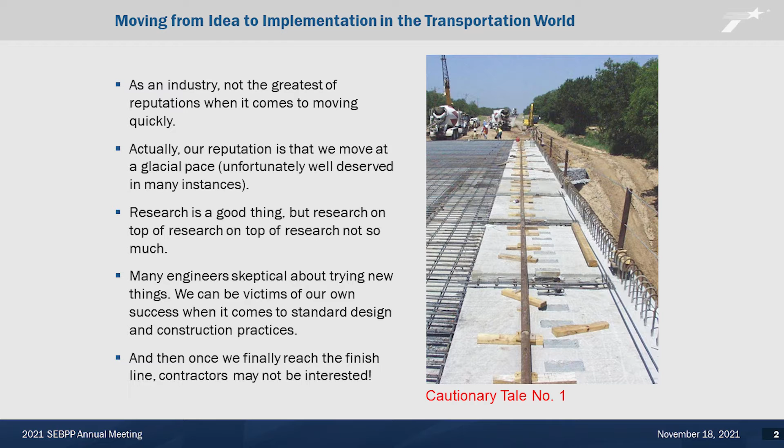So the photo I show there is cautionary tale number one. I've got a few cautionary tales in this presentation. Those are the overhang panels that we spent about 6 years developing in Texas. Anybody want to guess how many times they have been used since we got them in the standards? It's zero. So something to keep in mind as we are looking at new technology and developing new things: make sure everybody's on board. Don't do it in a vacuum. Point is, as an industry, we don't move real quick.

But I think this doesn't really apply to us in this partnership. We've managed to really come together in a way that allows for pretty rapid deployment of new technology and new ideas. And I think that's something that really sets us apart from a lot of the other groups. So a lot of what I focus on in this presentation is how we've done that, and specifically how we've made that work in Texas.

So the National Bridge Preservation Partnership is really finding a way to foster communication, and that's what we're doing here. There's lots of us here: lots of DOTs, owners, consultants, suppliers, manufacturers, FHWA, lots of different folks. We really rely heavily in these meetings on technical content. There's not a whole lot of fluff, and I think that pays off. We're really getting into some nitty-gritty details on the technical side of things. That bullet: it's not just the DOTs talking to each other.

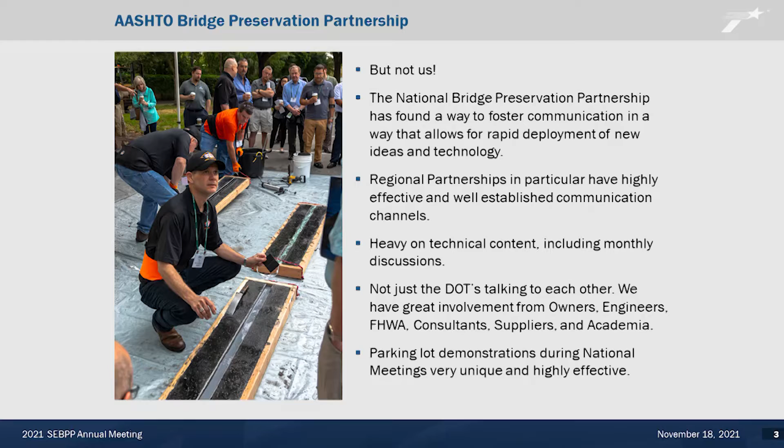It's so important that we all come together and have these conversations. And something that I show there in that photo, those of you that have been to the national meeting. So we have these regional meetings every year, and then the national meeting every 4 years. These parking lot demonstrations are really just out of this world. Just a phenomenal opportunity to learn about new things. So you can see one there in that photo.

Here's another one. People are really, really engaged in these, and I know a number of you have been to them. If you haven't been to one of these, I urge you to try to make your way to a national meeting, and I'm hopeful we'll be able to do these parking lot demonstrations again, because it's just super, super cool to see this stuff, not just talked about, but you're seeing the stuff get mixed and placed, and in a lot of places you're able to get your hands dirty a little bit. Really, really cool stuff going on there.

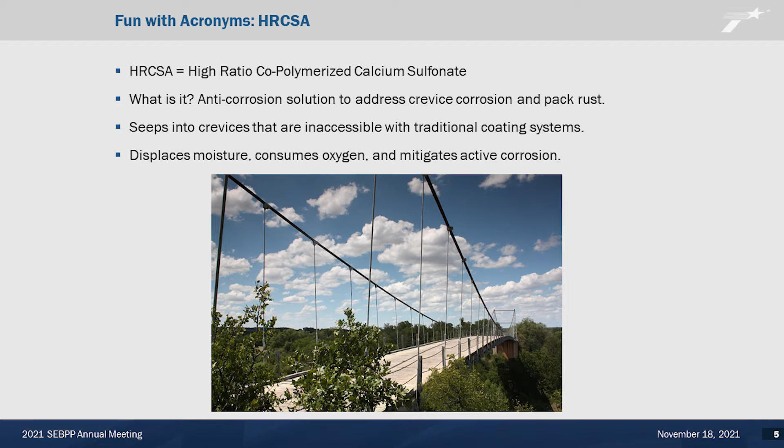So just want to give one example. Here's a fun acronym, HRCSA. What is that? The high ratio co-polymerized calcium sulfonate. What it really is, it's an anti-corrosion solution that will get sucked into those hard to reach steel places that you can't get to with the traditional coating systems. So this is something that I saw in a parking lot demonstration in Orlando.

We have this suspension bridge in Texas and some really, really hard to reach areas in this thing. So we learned about this product. It gets into those hard to reach places, displaces the moisture, consumes the oxygen, mitigates the corrosion. And what we were able to do in this case was use a kind of a mixture of the Thermarust and the coating system, and ended up with a good final product. And I don't think I would have ever known about this had it not been for the time we spent in that parking lot. So it paid off immediately for us.

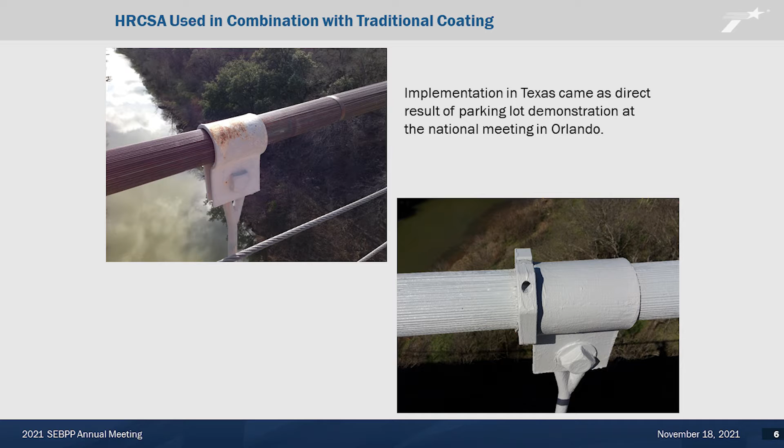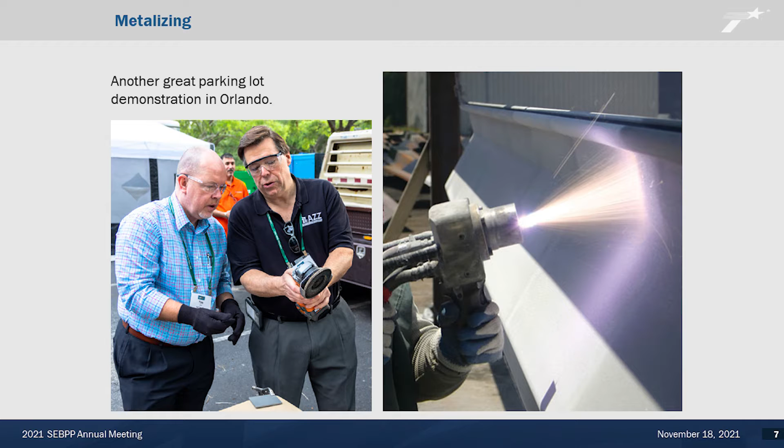Here's another cool one. Hopefully our good friend Kevin Western is in the audience somewhere. He's a regular at these conferences. I think many of you probably know him. He talks about a number of things, but in particular, he has talked about metallizing. This was another great parking lot demonstration in Orlando. So we looked for opportunities to take this back into Texas and implement. And it's really effective. It's a great tool to use, but you've got to do it smartly. You've got to do the right thing.

So here we are at cautionary tale number 2. Metallizing. It's a well-established, highly effective technique. It's been used for years in a lot of places around the country. Illinois in particular, I think, has many, many examples of good metallizing projects. This was something new to us. Took it back to Texas. We learned some hard lessons the first time we did this on an existing bridge. And things that just seem really obvious now, and should have been obvious, caught us off guard on this first one.

So important that I think when we are implementing this new technology that we engage the experts. We talk to other DOTs, we talk to the suppliers, we talk to the consultants, and really get a good set of design plans together, and that we have their involvement during implementation, because I mean, just obvious stuff. The flash rust got us on this project, and the other thing that got us was the torch cut corners, the really sharp corners in these bottom flanges, and metallizing does not play well with sharp edges. And so we ended up with a pretty sizable change order for something that in hindsight we should have anticipated as part of the design. So last bullet there, very important to engage the outside experts to assist in design, plans, implementation, and inspection, especially if you're trying something new.

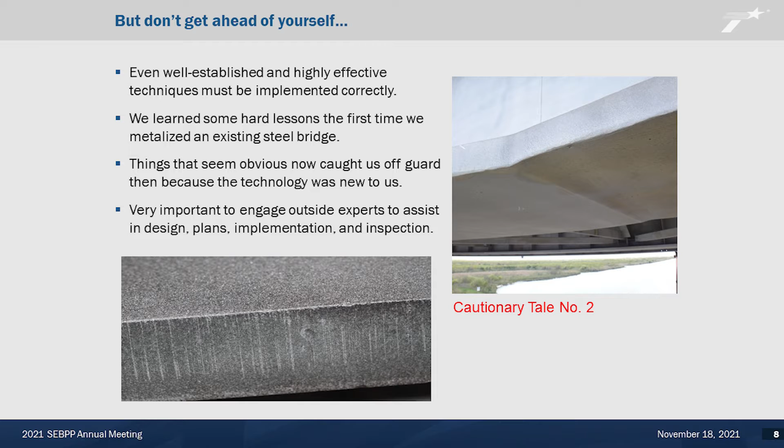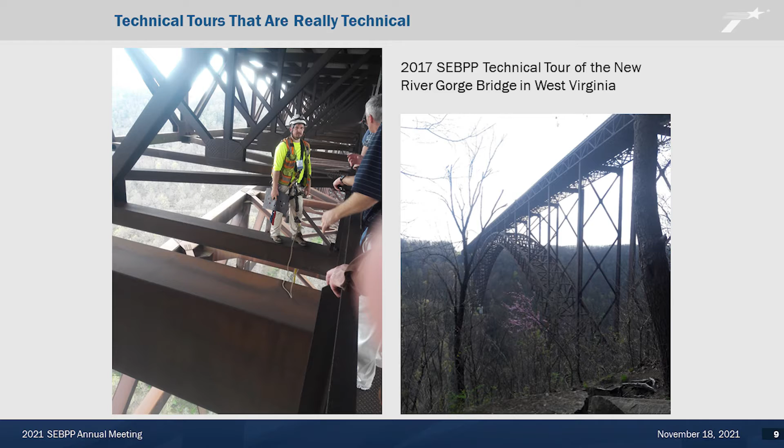Something else that we do as a partnership. We don't always get to do it, but we do get to have some pretty cool technical tours. This was the technical tour of all technical tours. I think it's probably time to start talking to West Virginia again, because we got to go see the New River Gorge Bridge, the catwalk, and this was just tremendous. So we had a consultant that had just done the design on the pretty significant rehab of this bridge, including resetting the bearings. Gave a long presentation. West Virginia DOT gave a long presentation, and then we got to load up on buses and go do the catwalk underneath the bridge.

And it was just phenomenal to have the opportunity to do that and to see what they were able to accomplish. Anyway, 2017, that was 4 years ago. I think hopefully in a few years we can start begging them to go back, because that was really just

an amazing opportunity. And then even 2 years ago, when we were in Baton Rouge, we had a really good presentation that David gave on the Mississippi River Bridge and the recent work they had done on that. And we didn't get to walk the bridge, but we kind of did it in the shadow of the bridge while we were eating crawfish. More things that we do.

So John mentioned the working groups that we have, and there's a number of great opportunities for collaboration, not just within the partnership, but with other groups around the country. So the FHWA's Bridge Preservation Expert Task Group, there's a number of representatives in this room that are on that. The AASHTO T9 Committee on Bridge Preservation, we work very closely together on that one. David and I are both on T9, and we work closely with this group.

And then the AASHTO Committee on Maintenance, the Bridge TWIG, the Bridge Technical Working Group. This is another group that we engage with on a regular basis, and there again, David and I are kind of the liaisons between that group and this one. And then just a ton of regional and national working groups that are meeting regularly, monthly in most cases, and really getting some great work done.

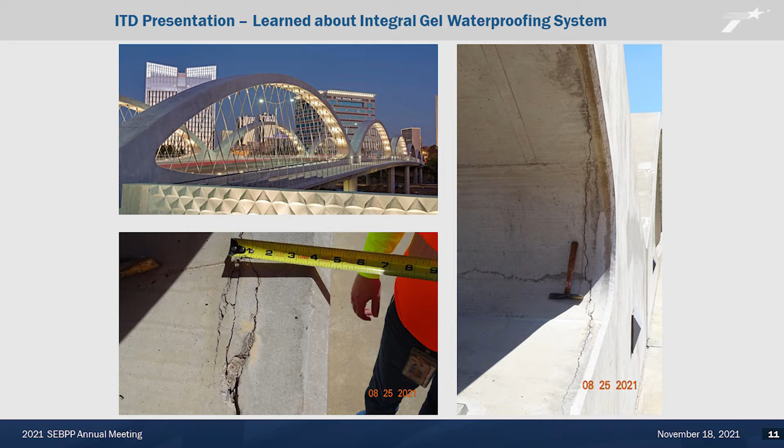So this is the West 7th Street Bridge in Fort Worth. This is one of our signature structures. It's made up of 12 arches. For whatever reason, one of those 12 arches has just been cracking almost from day one, and we've been chasing it and trying to figure out what to do about it. But you can see there, those are some pretty gnarly looking cracks.

And so we're about to do a project with this integral gel waterproofing system, and this is a product that we learned just because we sat in on one of those ITD meetings. So I know a number of you are already on it. If you haven't been on it and would be interested, it's one I would definitely suggest getting in on.

Something else we've talked about at length: hurricanes, floods, emergency response. We have most definitely had more than our share in the southeast of severe weather. Lots of hurricanes, lots of flooding, lots of nasty, nasty stuff going on. And so there have been numerous presentations and discussions on emergency response. And really, it's not just telling the story.

We talk about how case histories really don't offer much value if there's not some takeaways from it. And so what we try to do with these emergency response presentations is really talk about what went well and what didn't go well, and try to talk to each other so there can be some lessons learned along the way. And the contacts made as part of this partnership is really what led to widespread collaboration.

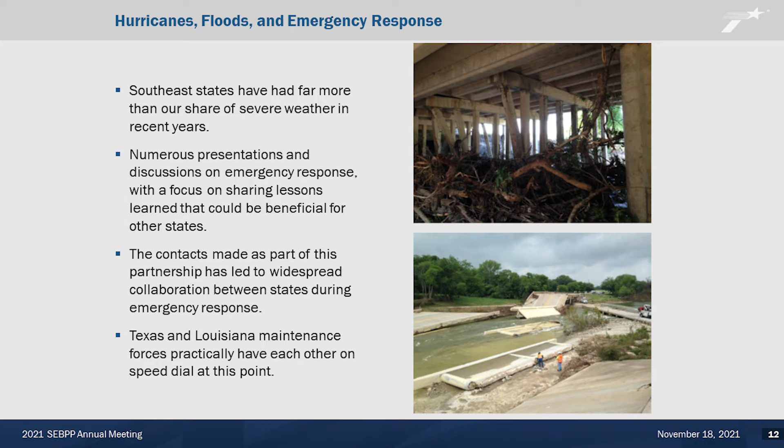And I put there the Texas and Louisiana maintenance forces, I think, pretty much have each other on speed dial at this point, because we had a few years where the hurricanes couldn't miss us, and now Louisiana's had a few years where the hurricanes can't seem to miss them, and Florida, of course, really all the states in the southeast are having this issue. But lots of opportunity for collaboration and lessons learned on that one.

All right, let's get back to some of the technology that we've learned as part of being part of this partnership. And hydrodemolition has been a topic for years and years and years.

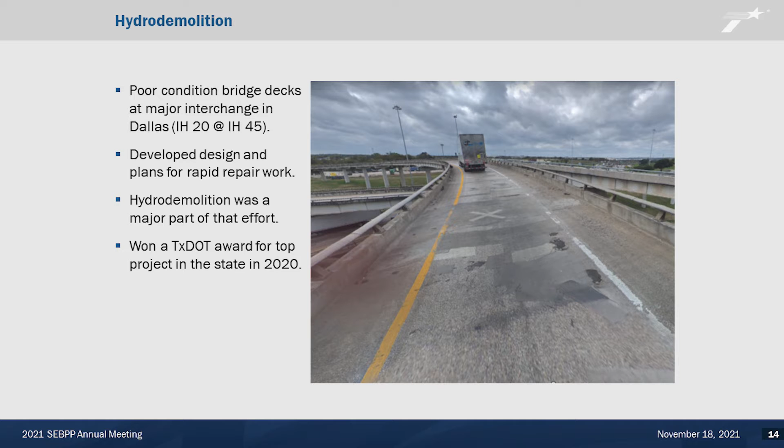There are several champions of hydrodemolition. They are always a sponsor at this, have a lot of involvement. So this is something that we hadn't done much of at all, and increasingly this is becoming a pretty common part of our bridge rehab project.

So the example I gave here, this is a photo straight from one of my presentations that I gave a couple years ago on problematic bridge decks. And this is in Dallas. This is a direct connector connecting two interstates. And this is a pretty sorry condition bridge deck. And it's a big deal when we close the ramp down. So we had to do something quick, so we developed design and plans for rapid repair work, and hydrodemolition was a huge part of that.

So we did have to close the ramp, but using the hydrodemo and a concrete overlay, we were able to do it very, very quickly. And this one ended up winning an award, not just for bridge rehab, but for any TxDOT construction project. There are gold, silver, and bronze awards, and this one actually won the gold medal for top project in Texas last year, and there's a couple of photos of it. So pretty cool stuff.

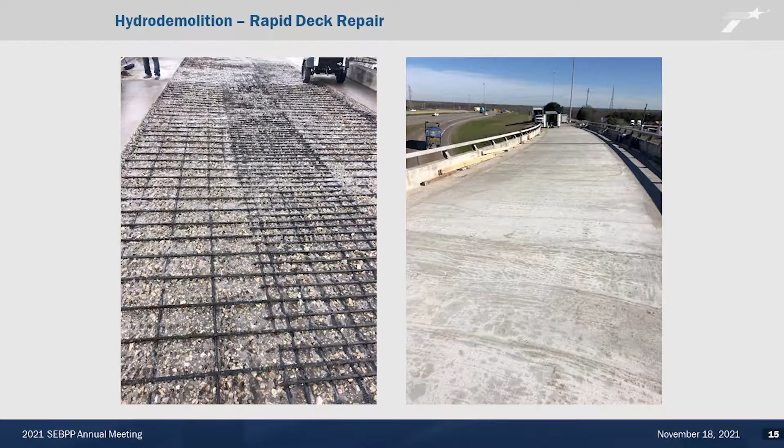Now this was a big jump. This was awesome. You'll see a little more about this project in some later slides, but this is the San Jacinto River Bridge, I-10 outside of Houston, and it got walloped by a barge. And we had to do a lot of work. We had to rebuild a couple of columns. We had to repair a couple of columns. And this was actually the contractor's idea.

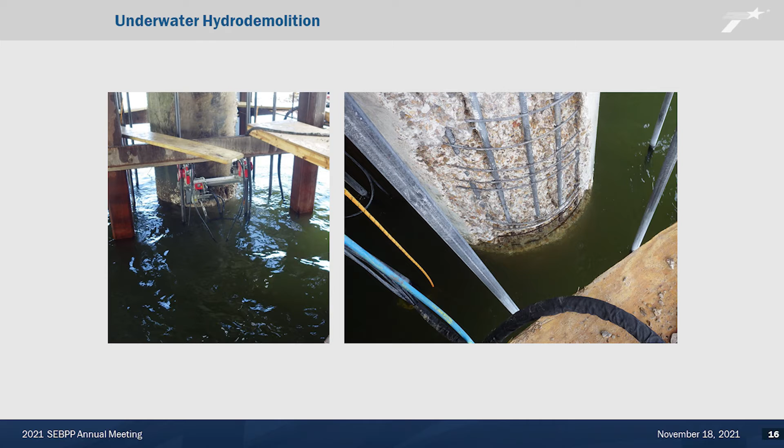He rigged up this underwater hydrodemolition thing to go underwater and take the concrete off outside the cage of this column. And it was just awesome to see it. Really amazing to see it at work, and really helped us out on this project to get in and out of there quickly.

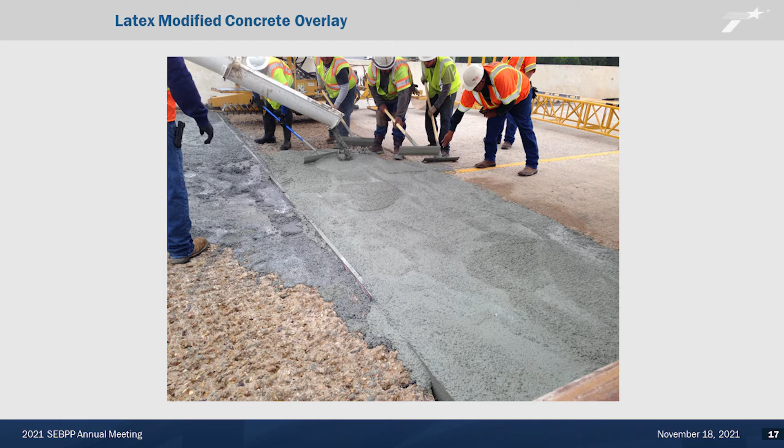Heard a little bit earlier about the latex modified concrete overlay and how widely it's been used in Arkansas, and there's a number of other states that have used a lot of the LMC, and this is another one where we've got Pat Martins and Ed Liberati here as active participants in this partnership. They talk a lot about the hydrodemolition and the latex modified concrete. So I heard a lot about latex modified concrete, decided I wanted to go home and implement it. This is cautionary tale number 3. We know LMC is a material that has been used successfully around the country, but here is not a recipe for success on a project.

You got an experienced designer, but no experience with LMC, and I don't want to embarrass anybody in the room, but that engineer is in the room. It's me. We had a contractor that knew latex modified concrete, but they sent a crew not familiar with it to the job. We had inspectors that were experienced in bridge construction, but not bridge rehab. None of those things work together to have a successful project. Resulted in really 2 pretty disastrous projects in Waco, one of them on the interstate.

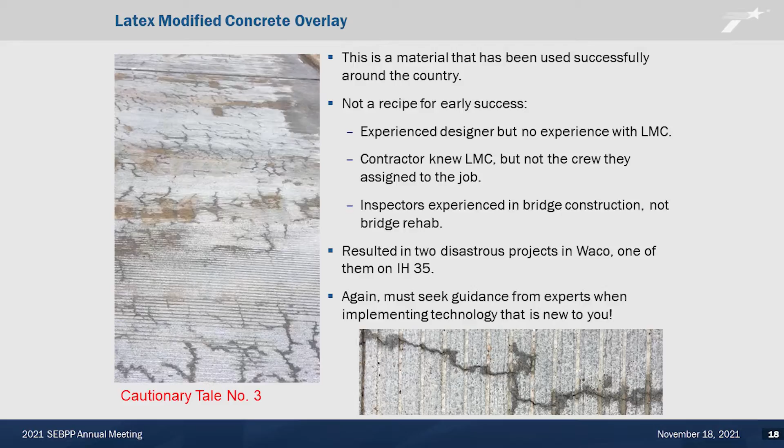So this is a big black eye, right? And it's hard to recover from that black eye on new technology. So be cautious. And again, seek guidance from experts when you're implementing new technology. The problem wasn't with the LMC, the problem was with me and the contractor and the inspectors on this one. But it's tough, right? So all of a sudden we've got 2 bad projects, and it's hard to recover from that.

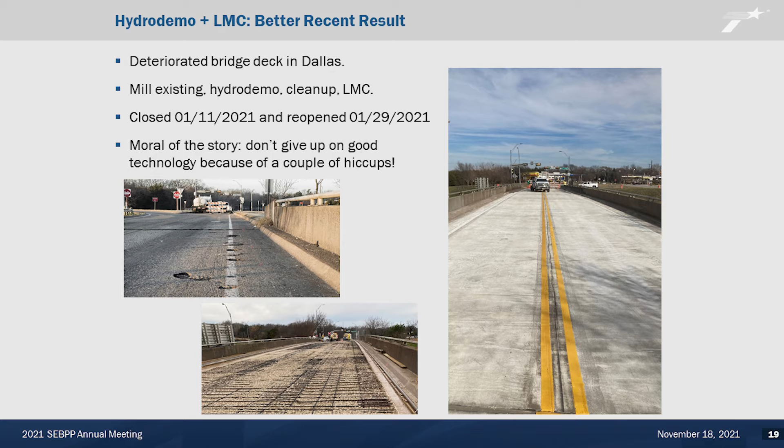But, better news. Here's a recent project in Dallas. So we're trying hydrodemolition and LMC again, and we're having much better results. This is a deteriorated bridge deck in Dallas, so really pretty straightforward. We're going to mill it, hydrodemo, clean up, LMC. You can see pretty quickly we were able to get that sucker closed on the 11th of January and reopened on the 29th. And really the moral of the story here, don't give up on good technology because of a couple of hiccups. Tried it, it didn't work, but we went at it again, and now it's working successfully. This is technology, again, that we knew was good.

Here's another cool one, Polyester Polymer Concrete Overlay. I put 2018 there. I think it was 2018. So it was the North Carolina presentation. Tim gave the perspective from the DOT, and Kwik Bond gave the supplier's perspective on it. And really great presentation on it. And this is becoming a mainstay in Texas now. The PPC overlay, we've had a lot of success with it already, and it's becoming a lot more commonplace.

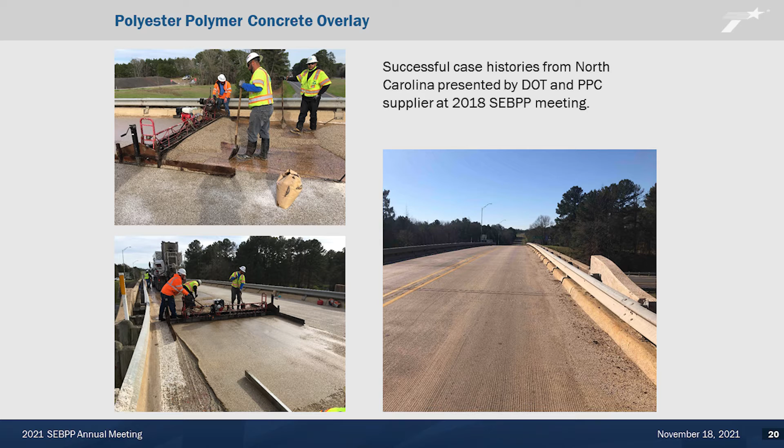We learned about it from presentations given here. UHPC, this is something talked about not only with our partnership, but in lots and lots of different meetings. Been on our radar for years, been talking about this forever, right? Excellent work being done by FHWA. A number of you have probably been in Dr. Graybeal's workshops. Universities looking at it, lots of other people looking at it.

And so we thought about it, and we thought about it, and we even did some research on it, and then we thought about it some more. We specified it a couple times in Texas, and contractors talked us out of it because they said, it's not available, can't do it here. So we thought about it some more and didn't specify it.

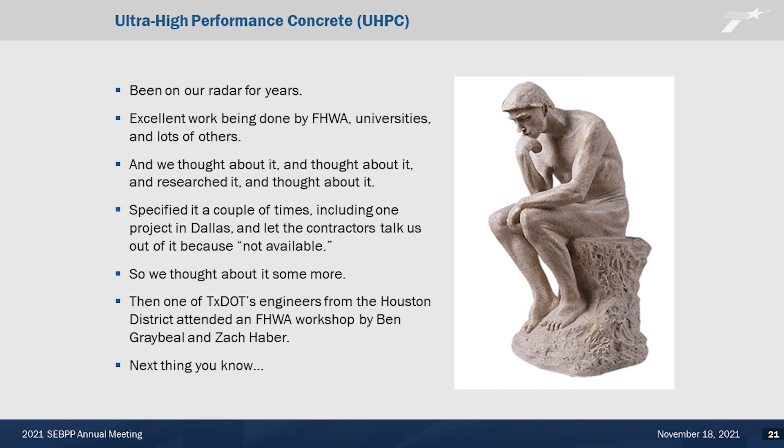And then we had a staff engineer from our Houston District Bridge Office sit in on one of the FHWA's workshops. And he went home and kind of unbeknownst to us at headquarters in Austin, he just did it. This staff engineer just said, this is the right application for this. So we had a pretty severely corroded steel bridge girder, pretty nasty problems, bearing problems, a lot of corrosion, a lot of section loss. This was an emergency closure of an interstate bridge in Houston. And he said, I'm going to encase that sucker because he heard the FHWA talking about that as an option.

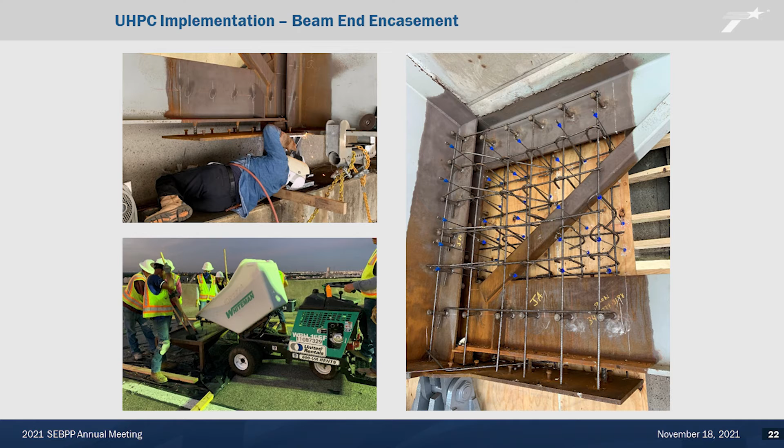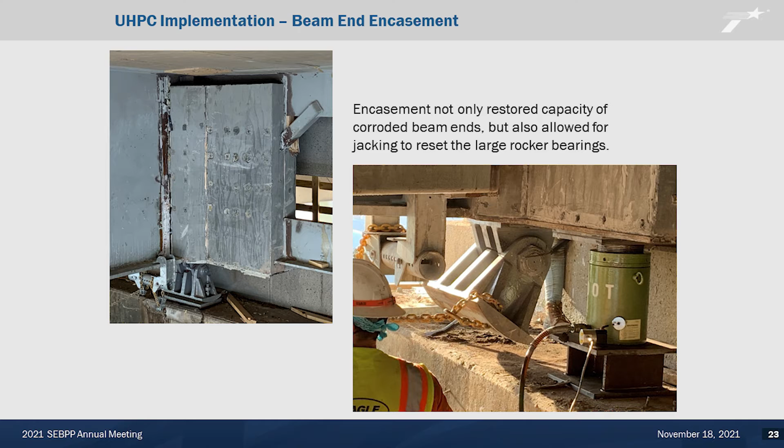And really, I was so impressed that he just did it, and he was careful about it. He didn't just go willy-nilly throw this thing in a set of plans. He talked to a lot of people, and he put together a great set of plans. Maybe a few more studs and other things than we would have put in. I think at the end of the day, it was a really successful repair. And, you look at this, the encasement not only restored the capacity of the corroded beam end, but one of the other things we needed to do was to be able to lift it up to reset those bearings, and the UHPC allowed us to do that too.

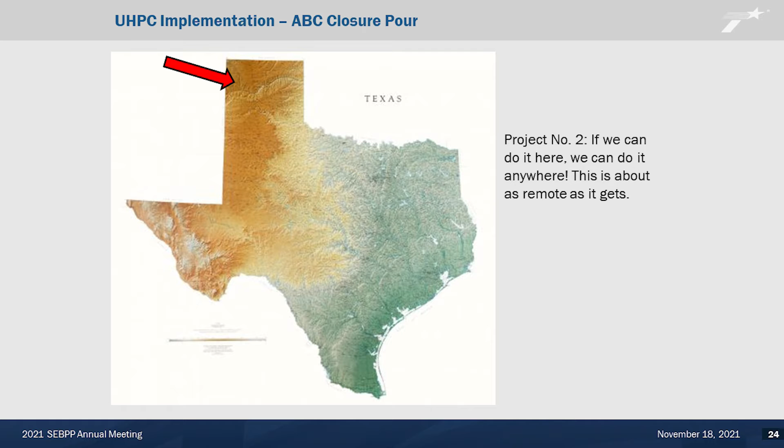Our second application of UHPC, we hear it's not available, right? In Dallas, we heard it's not available. That arrow is pointing to middle of nowhere. I mean, you want remote, that is a remote part of this country. It is miles from anything. If we can do it here, we can really do it anywhere, because that is as remote as it gets. And this was an ABC project. This is a pretty remote bridge, and so we had to do it quickly or else we'd be shutting people off. So we set some girders side by side, ABC fashion, and then had UHPC for the closure pour.

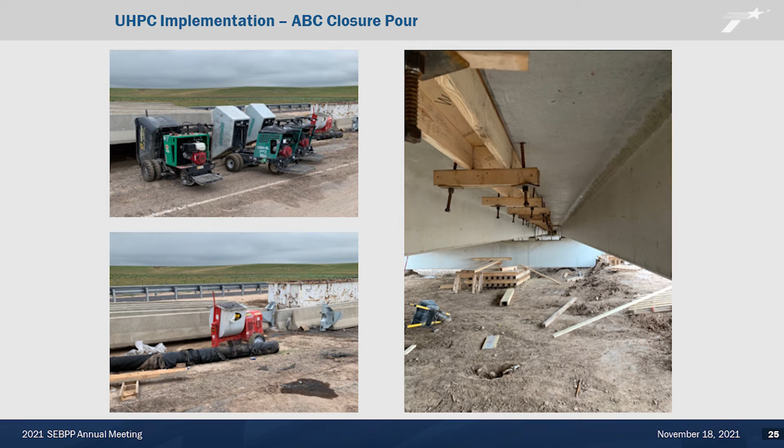It was great. So the point is, don't overthink it like we did with UHPC. At some point, we've got to be willing to pull the trigger. And our engineer in Houston District really made a bold move, and it paid off on that ship channel bridge. And being willing to stick to it if you feel technology is worth implementing. Don't let people talk you out of it for too long. Contractors a lot of times are resistant to try something new, but if we believe in something, we really just need to find a way to jam it into some plans.

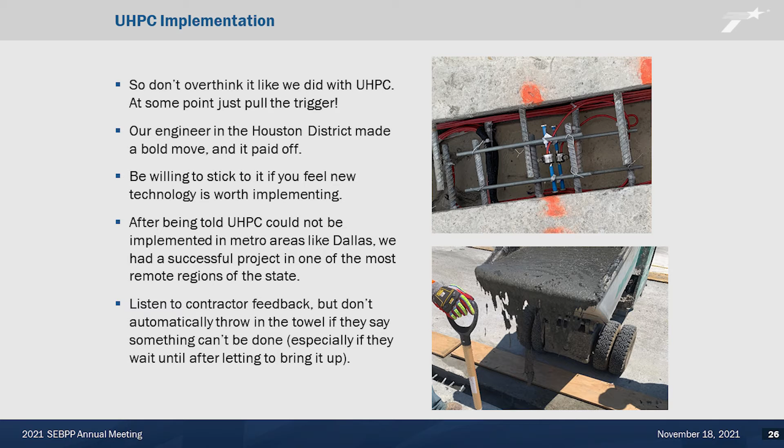Already talked about the idea that it's not available. It turned out really not to be the case. So I do think it's important to listen to contractor feedback. We've got to have them engaged, but a lot of times they're resistant to try new things just like we are. So don't let them talk you out of good technology.

Here's another one, titanium strengthening. Who here is interested in using titanium to strengthen their bridges? All right, there's a couple of hands up. It sounds really far-fetched, right? The first time I heard this, I was like, you gotta be kidding. Titanium, like, we're not gonna use titanium. But this was at a T-9 bridge preservation meeting in Portland, Oregon, and man, immediately caught our interest.

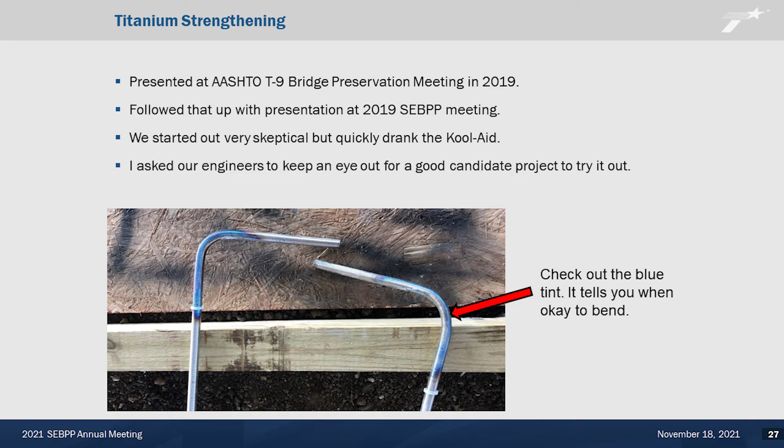And we followed that up with a presentation just a couple months later in Baton Rouge on the titanium strengthening. And if you haven't seen these presentations, I really urge you to get out there and look into this, because this is legit stuff. Really, I started asking our engineers to keep an eye out for opportunities to use it. And something else cool, if you've worked with it before, you can bend the titanium when it turns blue.

It's hot enough to bend when it turns blue. So just kind of a neat little tidbit there. Anyway, so what happens?

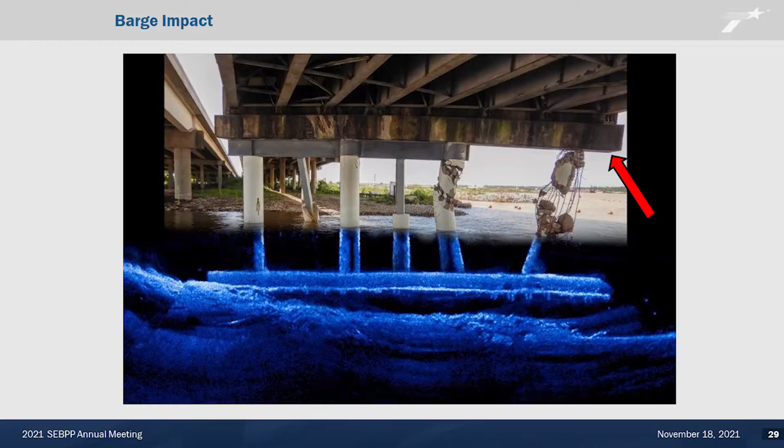So that exterior column got completely taken out, severe damage to that first interior column. And really the arrow, what I'm trying to show is you can see what happened to the cap. That it really deflected significantly downward. So what do we do? Titanium strengthening.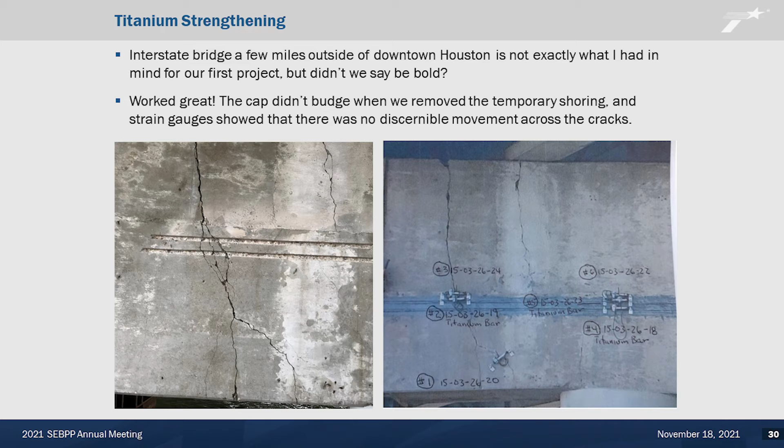I had been asking my guys to find a project, and when they said, all right, I-10 San Jacinto River, I was like, it's not really what I had in mind. Typically, maybe not something quite so high profile for the first shot at something, but we did it. This is just a few miles outside of downtown Houston, and it really worked great. The installation itself is really straightforward. It's not difficult to do, highly, highly effective.

And again, this is technology I don't think I would have ever heard of were it not for the partnership in this group and the work they're doing at T9. And the supplier of the titanium is here. So, seek her out, talk to her. She's been very, very helpful in this.

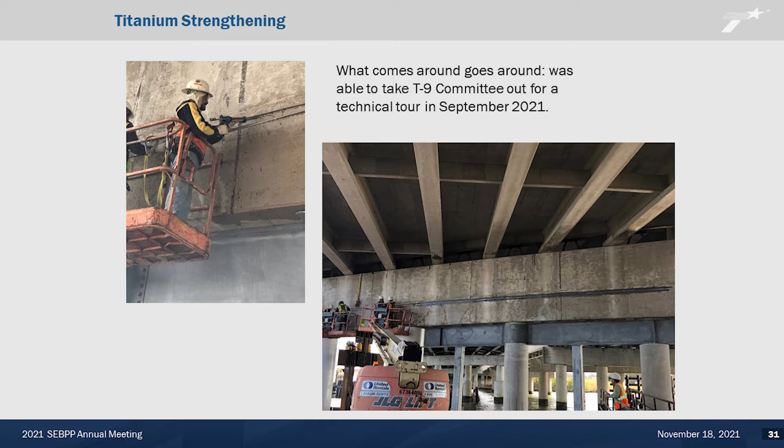And here's the installation. Really pretty easy. Saw cut your groove in, use some high strength epoxy, put your titanium bars in. And it worked great. We had some pretty major strain gauges on this thing, and when we took the shoring out, it didn't budge at all. So the titanium really works well. So pretty cool stuff. And it was kind of fun on this project.

I learned about it at T9, and then I just hosted them for a meeting a few weeks ago, and we were able to go out and take a look at it at the bridge. This is something that a lot of the states have been doing for a while, something that we haven't been doing in Texas for long, but this is yet another one that we learned about as part of this partnership.

The pile jackets with cathodic protection system, there's a couple of suppliers of these things. Really, really effective. I think Louisiana has been using them for years and years, Pontchartrain Bridge and other locations, and they're starting to really catch on in Texas. So we've got a lot of aging concrete piling and columns out there in some pretty nasty environments, a lot of salty, briny water, and it's eating up our concrete.

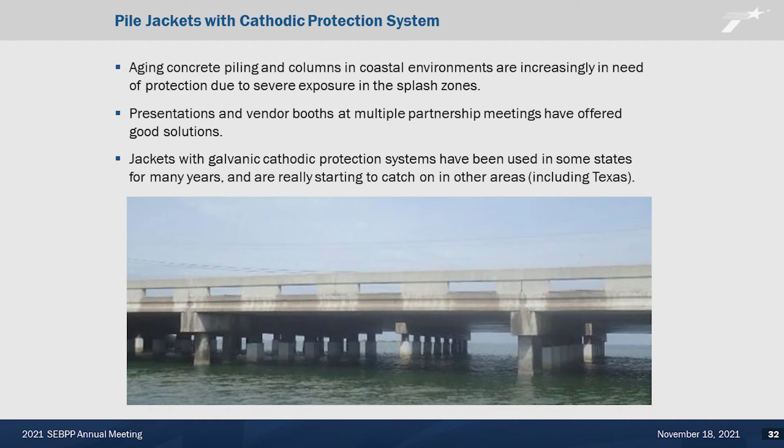So in these partnerships there have been several presentations, and there's always vendor booths covering this. So go take a look at it. It's good stuff. And I mentioned there that these jackets with the galvanic cathodic protection were used in some states for years and years. Not in Texas. We were able to visit with the DOTs. We were able to visit with the suppliers. This is something that we were able to use. So just because we weren't the first, it was still new to us.

So why is this collaboration so successful? I think the presentations and discussions during these meetings are not just commercials. We're not just having vendors come up and hawk their wares. We're really having honest conversations about the technical details of what's going to make something work. And we have very heavy reliance on the suppliers, the manufacturers, the consultants, all the experts in this group.

But we're really not just looking for opportunities for them to come up and give a commercial presentation. We're having really technical, nitty-gritty, detail type talks. And we really talk about the problems that we've experienced as much as we talk about the successes. And I think it's really important to have that collective willingness to talk about both our achievements and the failures. And I think it's one of the things that makes TSP2 bridge preservation so successful.

There's a lot of discussions about lessons learned in these meetings. So the open and honest dialogue there, I think it really leads to the opportunities for rapid and successful implementation of new innovations.

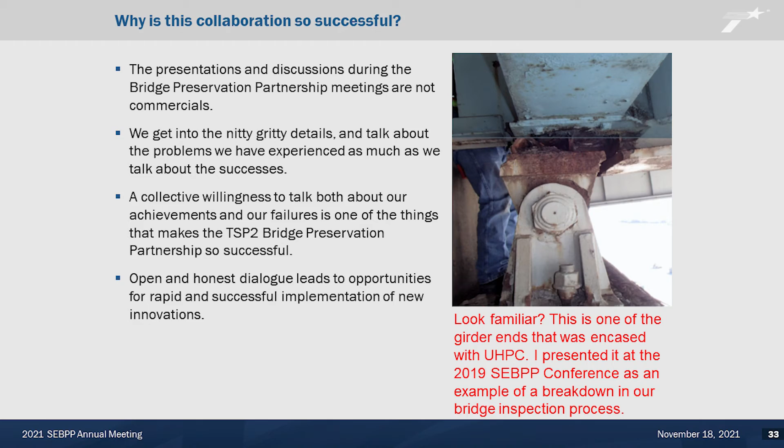So the photo I have there may not look familiar, but this was straight from a presentation that I gave a couple of years ago, and I gave it as an example of a failure in our bridge inspection process. This was something that just shouldn't happen, but this was actually one of the beam ends that ended up being encased by UHPC. So we were aware of the problem, but it had not yet been repaired when I presented this in Louisiana. And I think really, again, it's just that willingness to get out there and talk about it; we've got to air some dirty laundry.

And I think that there's often more to learn from these failures than from the successes, and we're willing to do that here. So I think this is my last slide coming up.

Closing thoughts. If you haven't already, please do embrace this partnership. I'm so grateful to have spent nearly a decade as part of it. There are a number of people in this room that I count as very close friends. John in particular has been terrific at helping to organize these conferences. I was not aware that you had officially called it, but I'm so grateful for the opportunity to have worked with you, John, and the work that Darlene and Zach and the other folks from AASHTO and Michigan State do is really just phenomenal.

But outside of that, I know a bunch of people because of my involvement with this partnership. So beyond just being a member, I really hope that you can embrace it and be a part of it. Really pay attention to the presentations, take these ideas home, talk and get to know each other. There's a lot of expertise in this room, a lot of experience in this room, so take advantage of that.

And get to know the vendors, please. Visit their booths. We should do that anyway. They put a lot of work into this. It costs them a lot of money. They put a lot of work into coming here, setting up these booths. So I think just in that regard, we owe it to them. But beyond that, do it for your own benefit, because these guys are not just salespeople. They really know their products, and they're going to be able to talk to you and teach you. And then when you do take it home, it's important that you know them so that you can engage them.